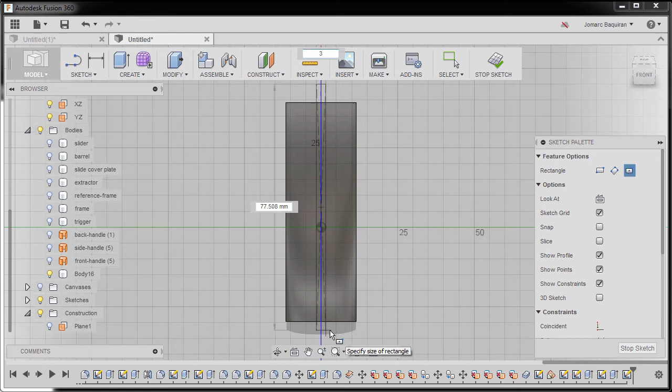I'm going to hit R to grab our rectangle and go to plane 1. Now under feature options, I'm going to select center rectangle and drop our center point here. Moving down, I'm going to key in 3, hitting enter.

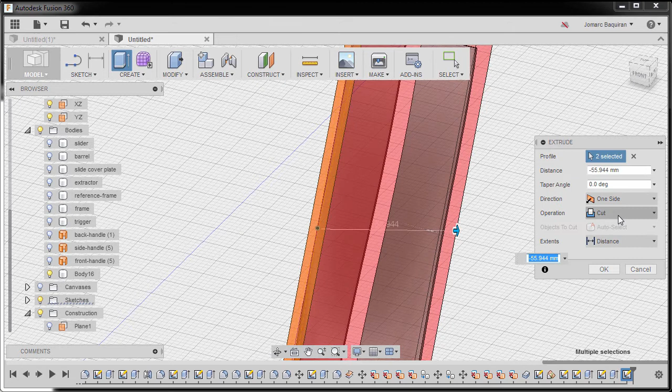Make sure that you are overlapping here and here. Hitting E to grab our extrude tool and selecting this profile, so 2 selected. Grabbing our arrow, make sure the operation is cut, extents to be all. Hitting OK.

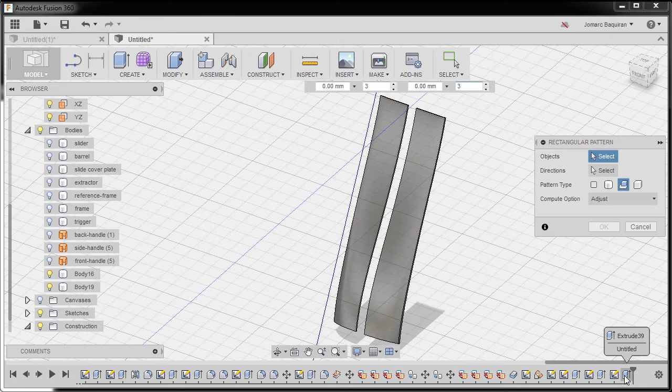Next, I'm going to hit S to grab our sketch toolbox and type PAT and grab our rectangular pattern. Now for the object, I'm going to make sure that pattern features is activated. Selecting extrude 39, activating directions, selecting this line, moving this arrow. Now for the direction type, I'm going to select symmetric.

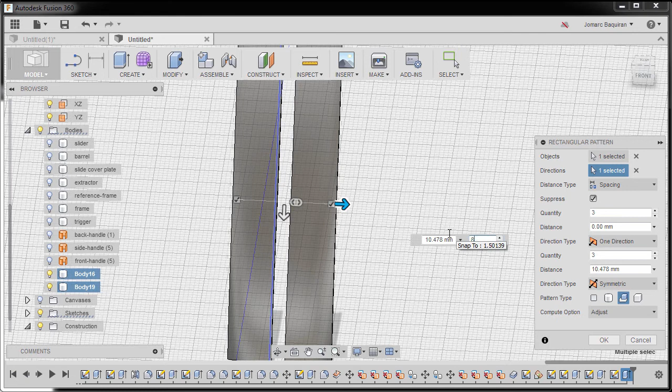For the quantity, I'm going to input 8. And for the distance, I'm going to type 4. Do take note that distance type is spacing. And finally, hit OK.

This is what our result is. Now, patterning features takes a lot of computing power. If you want to refine this one, the longer it will take to execute the command.

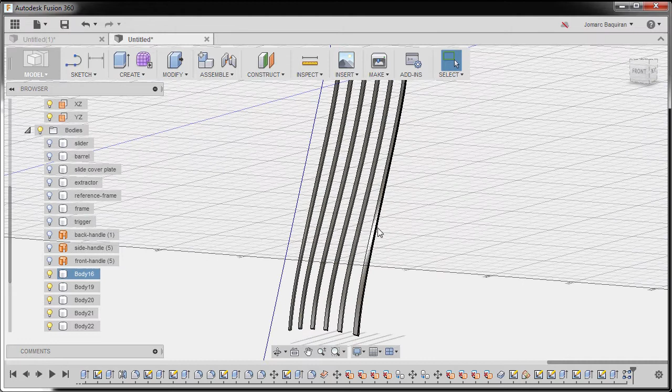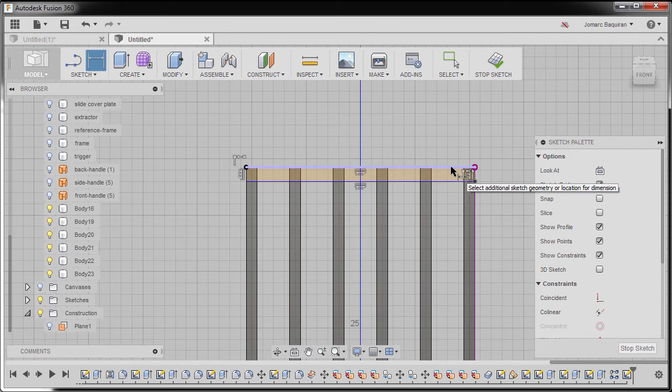So next, hitting R once more and selecting plane 1. Make sure you are using 2-point rectangle. I'm going to drop it here at this corner, next one here. Hitting D to grab our dimensions, selecting this horizontal line and this horizontal line.

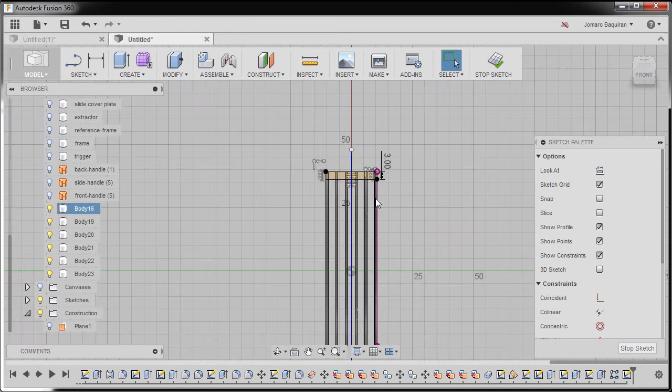I'm going to drop our dimension here. I'm going to type 2, or better yet, 3. Hitting enter. Now, this looks like a large value. So I'm going to change this to 2. Hitting enter. Hitting E for extrude.

And selecting this profile. Moving this one. And extends to be all. Hitting OK.

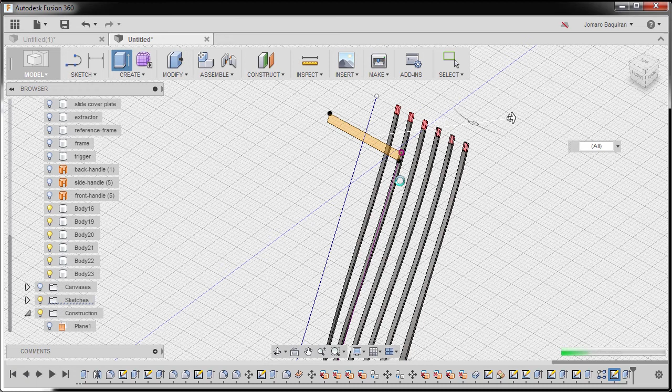Next, I'm going to hit S and type PAT and select rectangular pattern. Now, pattern type should be features. Object should be extrude 40.

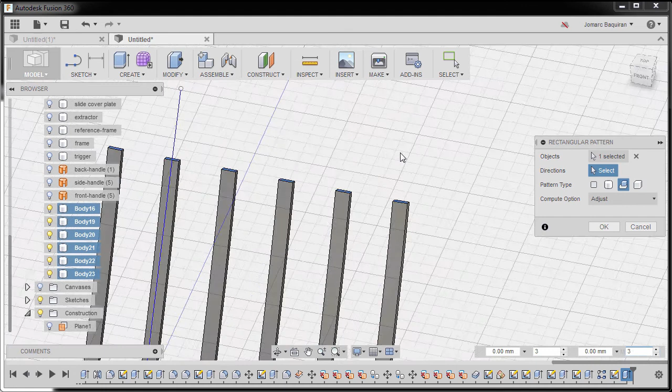Direction, I'm going to select this line. Now, I'm going to test a value for 8.

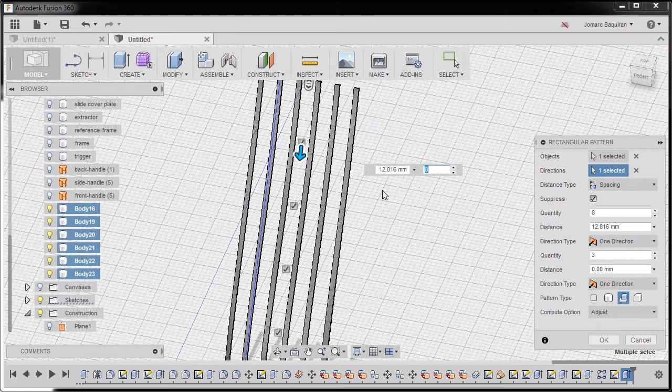And for the spacing, I'm going to type in 5 to check. And I'm going to change this one to 15. And finally, hit OK.

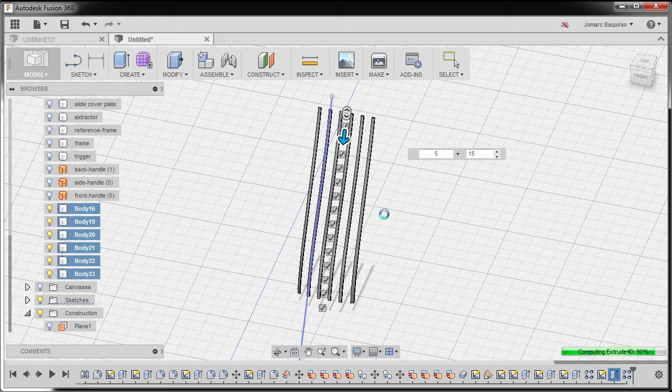So once more, the more features and patterns it is, the longer the computing time will be. So here's now our pattern. So you have the option to fully refine this one to bring it more tighter.

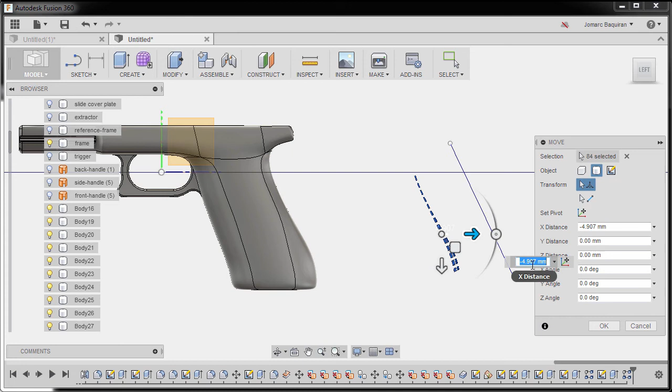Next, I'm going to turn on frame, going to left view, hitting M for move, and creating a window selection. So notice that the surface offset was moved to the right at 4.907 millimeters. So what I can do, I can input negative 4.907 to bring it back. Hitting OK.

And next, I'm going to select body 16 and scroll down, holding shift and left click body 101. I'm going to go to modify and select combine. Moving up,

I'm going to deselect target body just to make sure and reselect frame. So operation is join. So new component, uncheck and keep tools same as well. And finally hit OK.

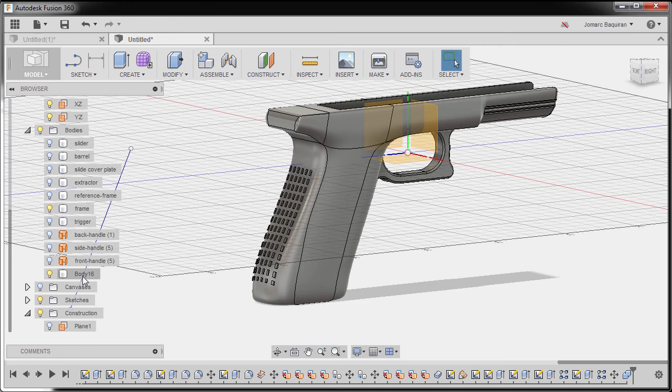So rechecking, body 16 was left out. I'm gonna go to modify once more. Or better yet, I'm gonna go to combine and select edit feature. Selecting tool bodies to activate and selecting body 16. So now it's 84 and hit OK.

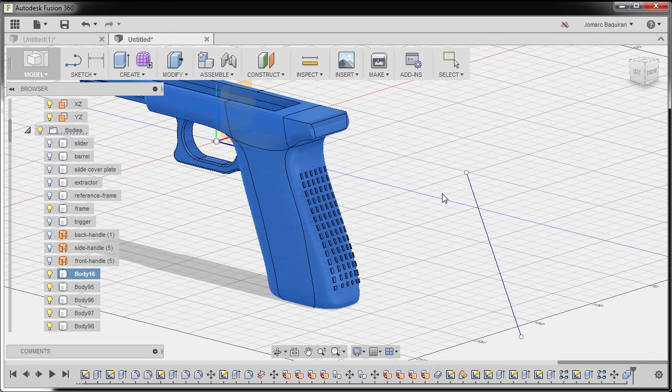So going back to home view. Now for us to create the same features here and the feature here, this technique will also be used for the latter.